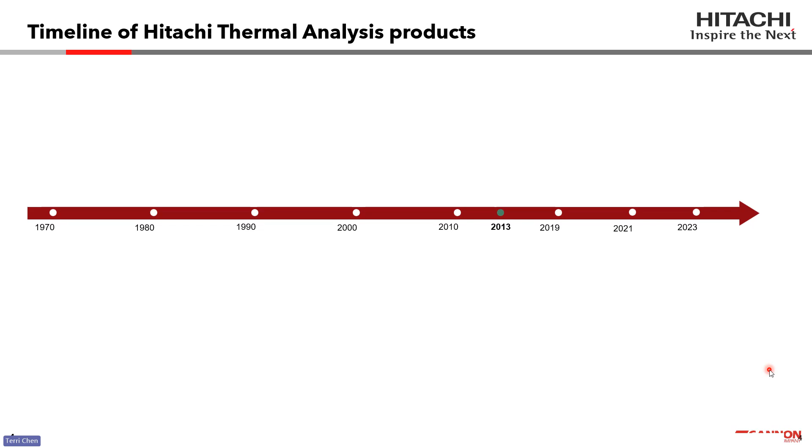So the history of Hitachi thermal analysis products traces back to the 1970s and 1980s. Some of you may still remember the name of an old thermal instrument company called Seiko Instruments. Back in the old time, Seiko was one of the world leaders who manufactured different models of thermal calorimeters. In 2013, Seiko joined the big family of Hitachi High-Tech. Ever since then, Hitachi has been investing more resources on developing new and high-end thermal analysis instruments. In 2019, Hitachi first launched their new model simultaneous DSC and TGA analysis instrument with the real view camera system. Two years later, they released their new generation DSC instrument, which has world-class baseline stability and sensitivity.

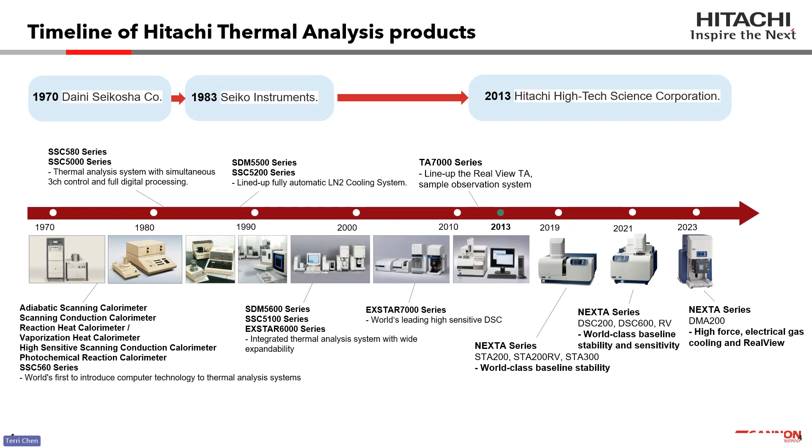Also, just last year, Hitachi again introduced their new model dynamic mechanical analyzer, the DMA instrument. As we can see, over the years, Hitachi has been actively introducing new model thermal instruments and new technologies to the world. Hitachi High-Tech headquarters is located in Oyama, Japan. They have over 70 dedicated thermal analysis employees, including manufacturing, R&D engineering, service, and applications. They have installed and sold over 10,000 thermal instruments worldwide, including in the United States.

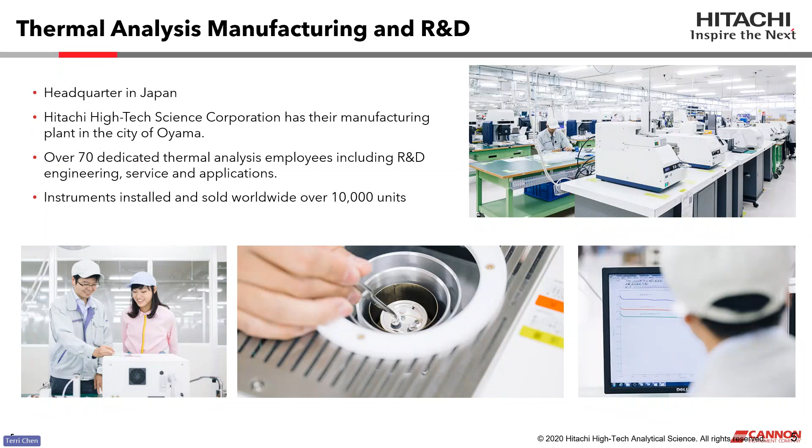Hitachi High-Tech thermal business has been very successful in many Asian countries, including Japan, China, Singapore, and India. Their thermal instruments are also popular in European countries, such as the UK and Germany. In the United States, Hitachi has its own thermal applications lab located in Dallas, Texas. They also have their own local service and support team.

This year, Hitachi is working with Cannon and is expecting to further grow their thermal analysis business in the United States. So therefore, in today's webinar, I am happy to introduce to our audience the Hitachi thermal analysis techniques. Also, I'm going to spend the majority of our time talking about the application of thermal analysis in the polymer industry. How can we use thermal characterizations to help polymer chemists and polymer engineers with their new product development and polymer processing?

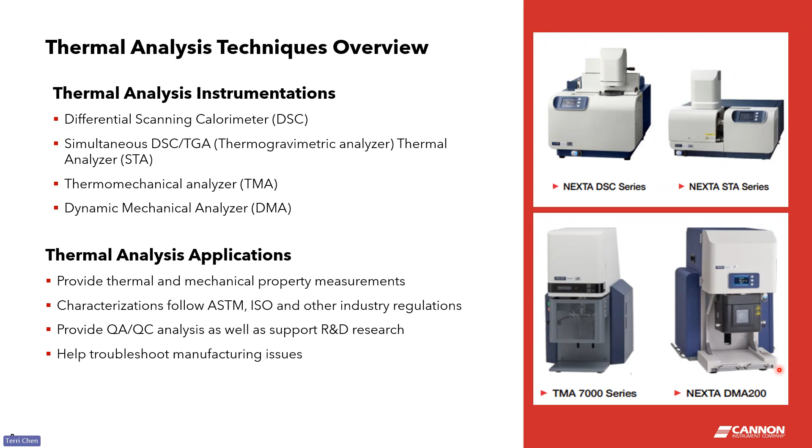Thermal analysis techniques have been widely used in polymer industries. They can help identify polymer resins, quantify impurities, provide compositional analysis, and also troubleshoot any production issues. These thermal instruments are commonly used as laboratory QA/QC tools, as well as for high-level research needs in R&D departments. Many of those characterization methods follow the ASTM, ISO, or other industry regulations. So in today's talk, I would like to specifically focus on discussing the application of 4 thermal analysis techniques: the DSC, the TGA or STA, TMA, and also DMA.

First of all, let us talk about differential scanning calorimetry. DSC is probably one of the most popularly used calorimeters in polymer industries. A DSC instrument measures the differences in heat flow rate between a sample and an inert reference. It can perform the measurements as a function of temperature or time. Through observing the endothermic or exothermic activities of the sample, a DSC scan can measure a polymer sample's glass transition, crystallization, crystal melting, polymorphic transitions, and heat capacity. The DSC technique can also be used to study thermoset curing, measure oxidative stability of a polymer resin, and also help identify impurities in recycled polymer PCRs.

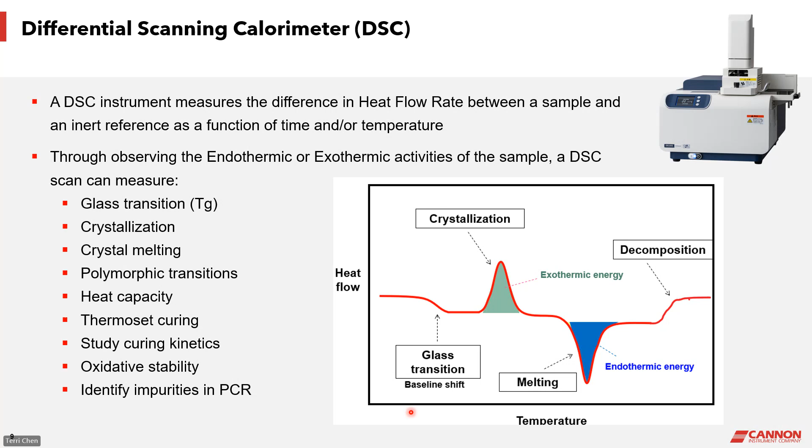Hitachi's new model NEXTA DSC provides their users with excellent baseline stability. This helps users build their confidence in data accuracy and repeatability. Hitachi DSC is equipped with a 4-finger design auto sampler, which allows up to 50 samples automatically loaded at the same time. The auto sampler provides the most reliable automation. It saves your sample loading time. For sample preparation, Hitachi provides users with an automated pan sealer, which ensures the best sample preparation reproducibility.

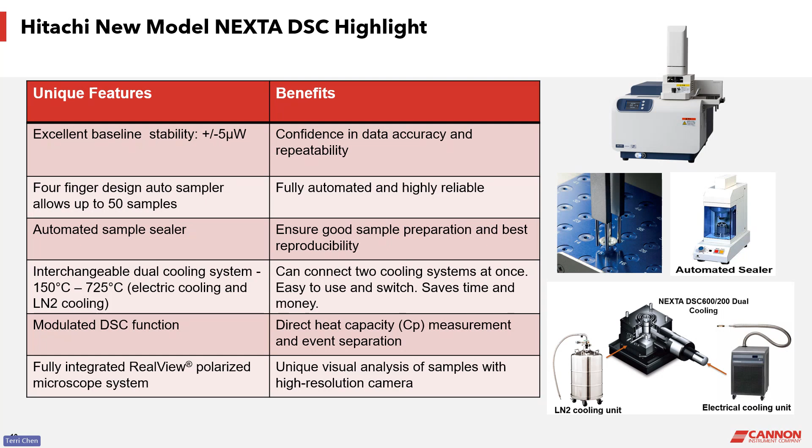One of the best technical highlights of Hitachi DSC is their flexible and interchangeable dual cooling system. Most DSC users know that a typical electrical cooling system on a DSC can cool the samples down from -40 to -90 degrees C, depending on which model you use. But if a user occasionally needs to cool the sample down to liquid nitrogen temperature, which is -150 degrees C, he or she may end up having to purchase an additional second DSC, which could cost more money and also take up more lab bench space. Hitachi DSC allows both the LN2 and electrical cooling systems installed on the same DSC unit. Users can select their desired cooling system through a simple switch in the software.

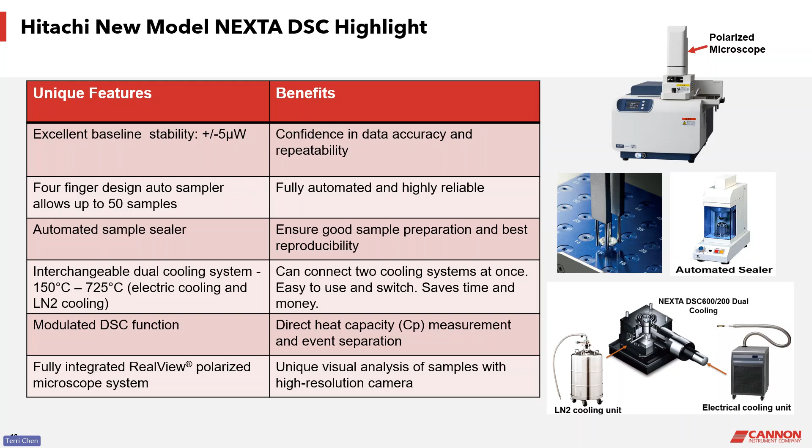Another technical highlight is this fully integrated real-view polarized microscope system. This microscope provides a unique visual analysis capability on samples during a DSC measurement. Here is a fun application example showing the usefulness of this real-view system. We put a picture underneath a piece of polymer sample. Because the polymer is partially crystallized, it looks black underneath the polarized microscope. However, as we conduct a heating test on this sample, let me play the video here.

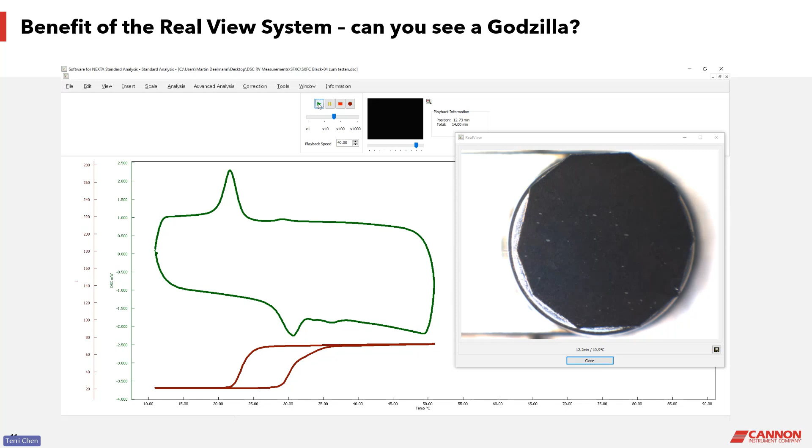When the temperature passes its crystal melting temperature, the polymer turns clear. Now we can see through. Now we see the picture underneath the polymer is a picture of Godzilla. Then, as we cool the sample down, the polymer recrystallizes and turns black again. Actually, there are many useful applications of having this polarized microscope visual capability. I will elaborate and discuss more practical examples in my later section.

The second thermal analysis technique I would like to talk about is TGA, thermogravimetric analysis. Hitachi provides their users an STA instrument, which is capable of doing simultaneous DSC and TGA measurement. In addition to monitoring the endothermic or exothermic activities of the sample, the STA technique is mainly used to measure the mass change of a sample through heating. For example, it can measure moisture or residual solvent content, monitor sample decomposition, calculate decomposition kinetics, and measure thermal and oxidative stability. It is also commonly used for compositional analysis of filled polymer composites. The STA is also a good high-temperature DSC, which can measure crystallization, crystal melting, and crystal phase transition.

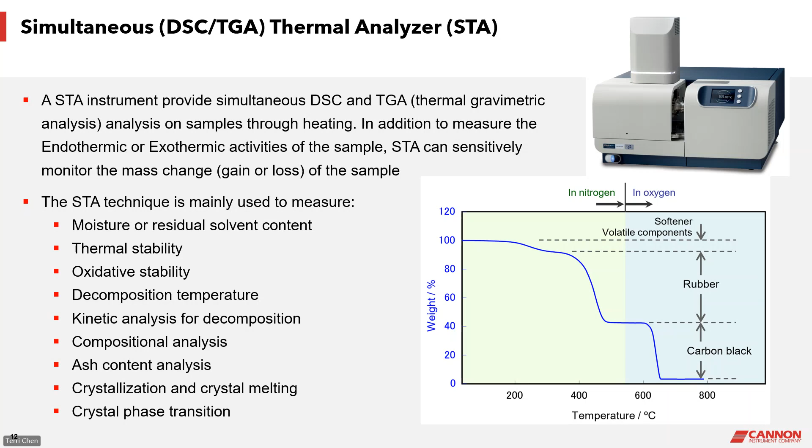Hitachi STA instruments have this dual beam horizontal design, which has low buoyancy influence with excellent baseline stability. This allows users to detect the smallest weight change even from the smallest sample size. The four-finger auto sampler design provides full automation and reliability on sample loading.

Hitachi STA has up to 4 gas flow controllers, which are easy to switch and allow mixture gas purge. Their efficient gas flow path is perfect for testing oxygen-sensitive samples. Also, the interchangeable furnace and furnace tube provide a wide temperature range and allow samples to be tested under a corrosive gas environment. Hitachi STA is also integrated with a real-view camera system.

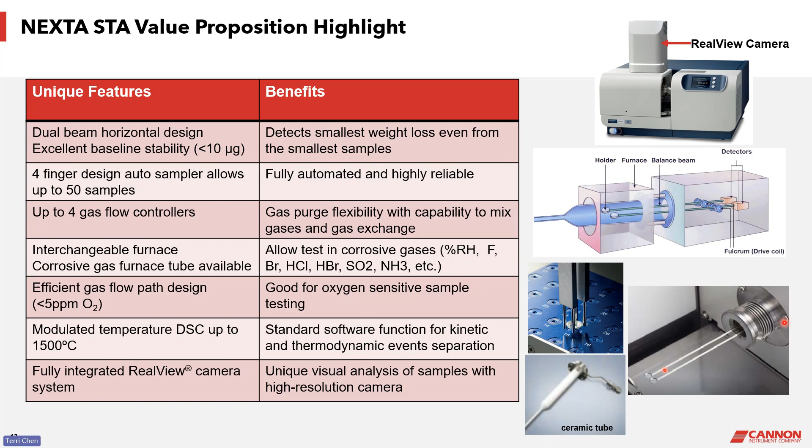One application example for this feature is that it can perform color analysis. You can monitor at what temperature your sample gets oxidized and turns yellow. The third thermal analysis technique I would like to introduce here is the thermomechanical analysis.

A TMA instrument is mainly used to measure a sample's dimension stability as a function of time, temperature, humidity, or under a certain force or displacement. TMA is commonly used to measure a sample's coefficient of thermal expansion, the CTE. It can also measure thermal shrinkage, softening point, and glass transition temperature. A TMA is also capable of performing some basic DMA mode testing, such as dynamic temperature ramp, stress relaxation, or creep.

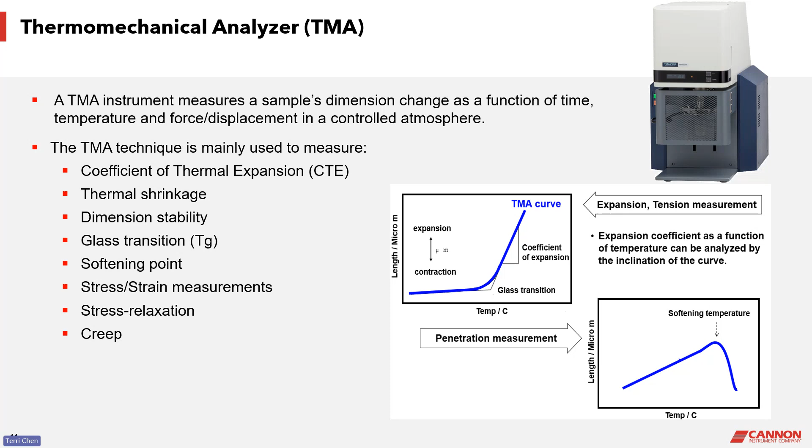Hitachi TMA provides their users with the highest force range, up to 5.8 Newton. This benefits testing large and stiffer samples and is also good for DMA mode testing. In addition to high force, this instrument also allows large sample size, which provides the best sensitivity for testing samples with low CTEs.

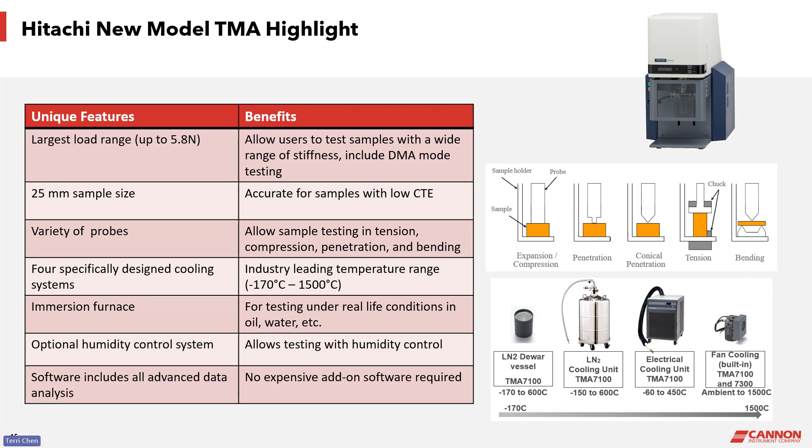Hitachi TMA instrument is equipped with a variety of different types of testing probes that allow samples to be tested under different modes, such as tension, compression, bending, or penetration. And this instrument offers 4 different types of cooling systems, which provide a wide range of temperature and flexibility for users to switch.

The last thermal analysis technique I would like to introduce is the dynamic mechanical analysis instrument, the DMA. A DMA measures the mechanical and viscoelastic properties of a material. The measurement can be performed as a function of time, temperature, frequency, or at a specific applied stress or strain. The DMA technique is mainly used to measure samples' stiffness, which is described as the modulus, and also samples' elasticity, which is described as the damping factor, the tangent delta.

DMA is the most sensitive instrument to measure a polymer's glass transition temperature, as well as any subambient beta-gamma transitions. A DMA can be used as a mini instrument to perform a basic stress-strain test to measure Young's modulus. It can also perform some transient measurements, such as creep recovery or stress relaxation.

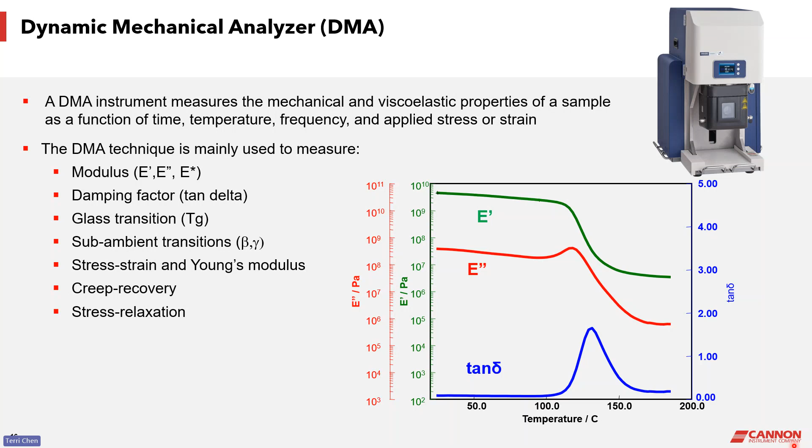Hitachi's new model DMA was just released last year in 2023. This DMA has a completely new motor design with a wide force range up to 20 Newton. This allows users to measure any type of sample from soft to stiff. The instrument is equipped with all measuring clamp options, which allow samples to be tested under different deformation modes, such as tension, bending, compression, or shear.

Hitachi DMA provides users with 3 different cooling options, which give a wide range of temperature control. The software offers a Wizard for sample handling, clamp calibration, and experimental setup, which is perfect for new users. Hitachi DMA is also equipped with a real-view camera system that allows users to see the sample during the measurement.

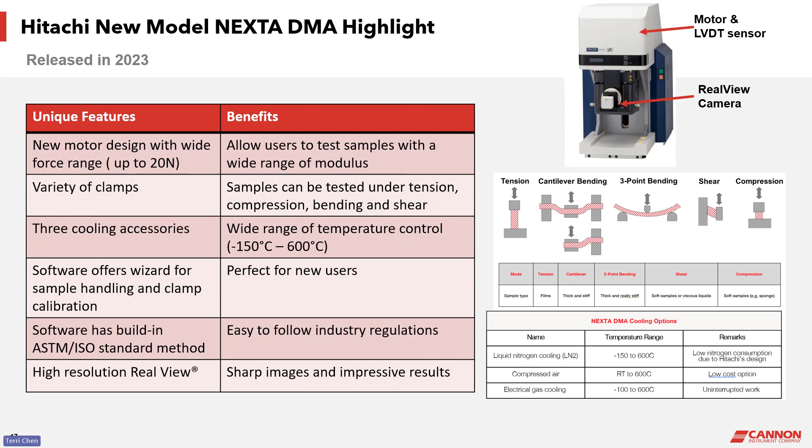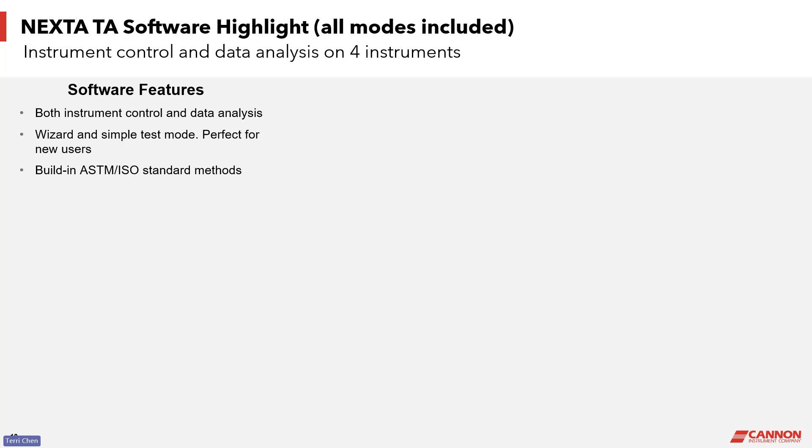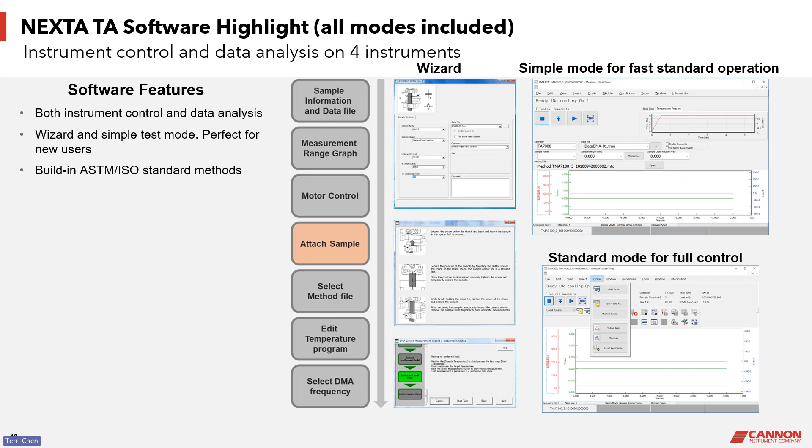Before we jump into discussing applications, I would like to also highlight some of the good features of the Hitachi NEXTA software. First of all, the NEXTA software is designed for both instrument control and data analysis on all 4 of their thermal analysis instruments. NEXTA software has a built-in Wizard with calibrations, sample handling, and experimental setup. It also has this simple test mode setup, which is perfect for new users.

In addition, Hitachi software has built-in ASTM, ISO, and other industry standard methods, which allow users to easily follow the industry regulations. This software is easy to use and self-learn.

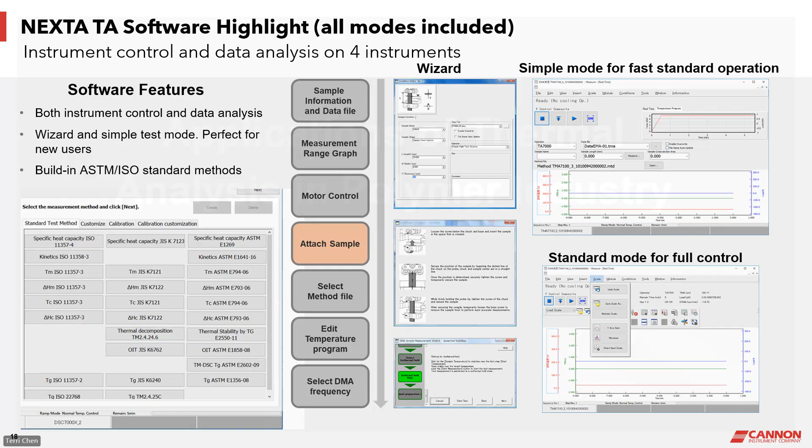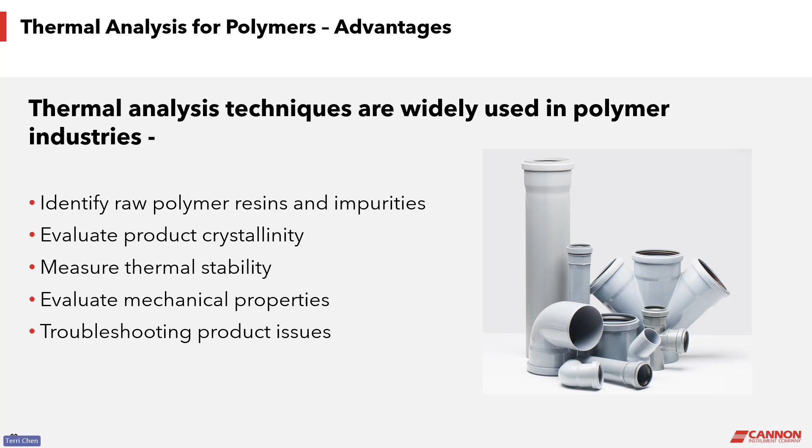In this next section, I would like to discuss some practical application case studies on how to use thermal analysis techniques to help with polymer product development and polymer processing. Like I said earlier, thermal analysis techniques are widely used in polymer industries. People use thermal analysis to identify their polymer resins, quantify impurities, evaluate product crystallinity and crystal melting, measure mechanical properties, and also troubleshoot production issues. First of all, let's talk about DSC applications.

DSC is probably the most commonly used thermal instrument in polymer characterization. DSC analysis is typically used for identifying the raw material. A simple DSC temperature scan can tell you if this polymer resin is a polyethylene, polypropylene, or if it is a PET resin. DSC identifies polymer IDs based on the differences in their glass transition and melting temperature.

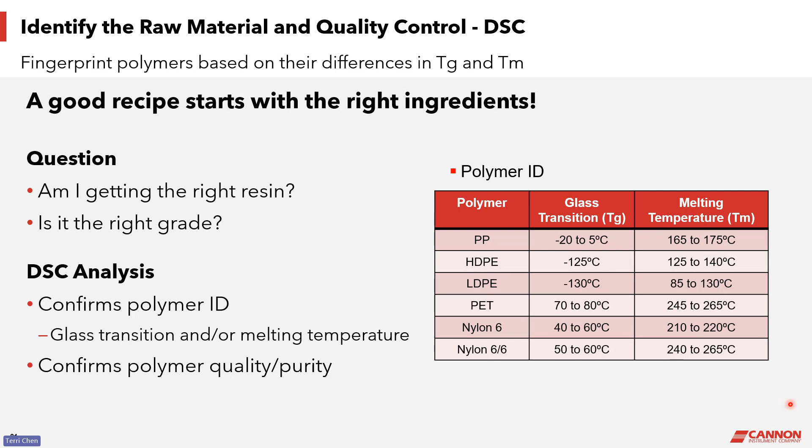Even within the same type of polymer, for example, polyethylene, the DSC measurement can also sensitively differentiate the differences in different grades. Here is an example of using DSC to differentiate the different grades of polyethylene resins. LDPE, low-density polyethylene, mostly contains long-chain branching structure. Therefore, they usually have relatively lower density.

Figure 1 shows two different grades of LDPE resin with different density. The measurement results show that they have their crystals melt at different temperatures. The higher the density, the higher the melting temperature. This same trend can also be observed in the case of HDPE resin.

High-density polyethylene resins are mostly linear. Therefore, they usually have higher density with higher crystallinity. Their crystal meltings are also observed at higher temperatures compared to LDPE resins. So figure 2 shows that for HDPE resins, higher density also leads to a higher melting. In polyolefin industries, this DSC measurement is commonly used to identify different grades of polyethylene and polypropylene resins.

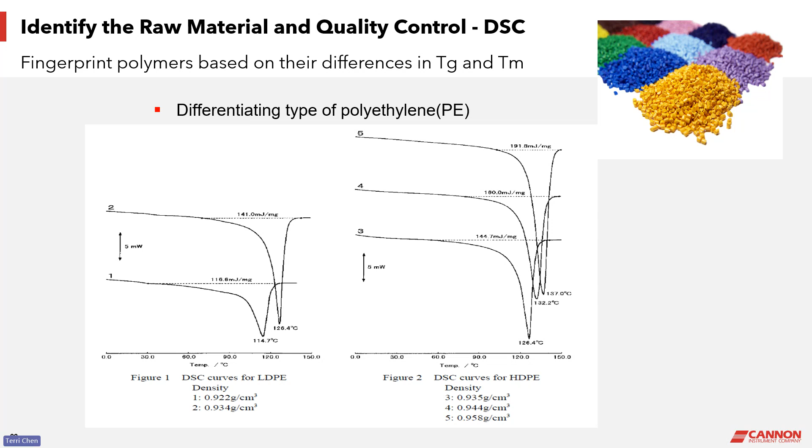DSC technique is also commonly used in polymer recycling for the purpose of identifying and quantifying impurities. So in this case study, from a DSC temperature scan, we observed a big crystal melting at temperature around 130 degrees C, which correlates to the melting of HDPE. From these results, we can say that for this particular batch of PCR resin, it mostly contains HDPE.

However, at temperature around 160 degrees C, we can also identify another small melting peak, which correlates to the melting of PP. So with integrating the melting enthalpy and comparing to the melting enthalpy of a pure PP, we can get a reasonable estimation to find out how much PP contamination there is in this particular batch of PCR.

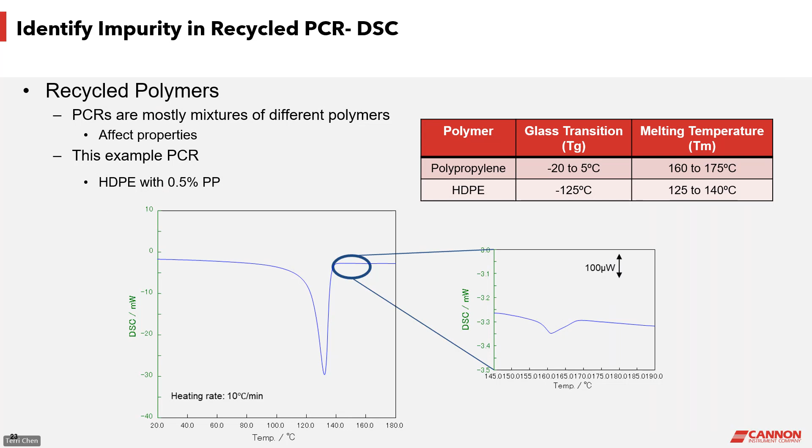DSC is commonly used to determine the oxidative stability of a polymer. There are some industry standards, such as ASTM, ISO, or DIN standards. They all provide specific instructions of using DSC to identify the OIT of polymers. OIT means oxidation induction time. This is a standard DSC test method to study the time of a polymer to start getting oxidized at a certain temperature. The figure on the left side shows the OIT test of 3 different grades of polyethylene resins.

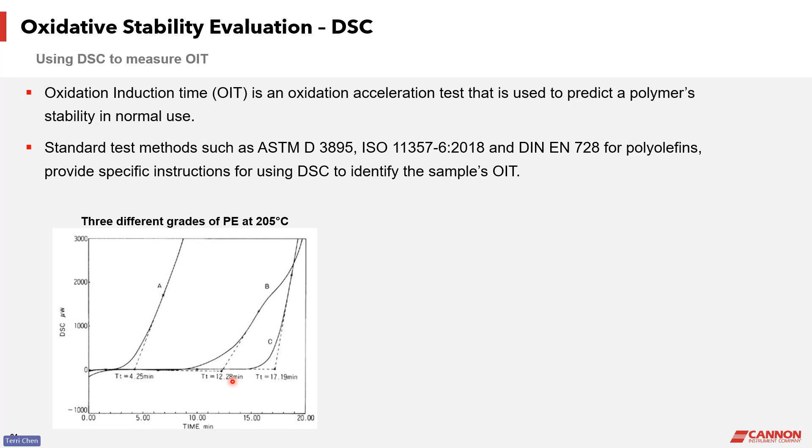After equilibrating at temperature of 205 degrees C, we switched to use air purge, introducing oxygen into the DSC furnace. So the OIT time is defined as the onset point at the heat flow curve. So from this comparison data, we can see that sample A has the shortest OIT, which means this sample has poor oxidation stability. This resin may need to add some additional antioxidant to enhance its stability. Well, sample C has the longest OIT, which means this resin is most stable against oxidation.

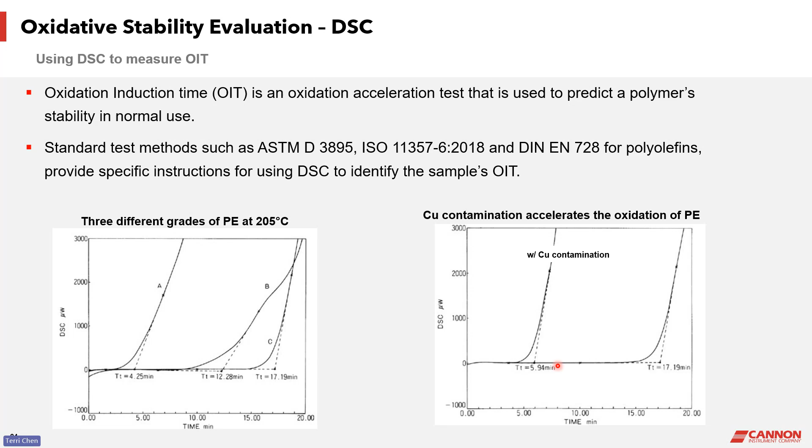The figure on the right side shows that copper contamination could significantly accelerate the oxidation of polyethylene. With just a small amount of copper contamination in PE, its OIT time is observed to be significantly shortened from the normal 17 minutes to less than 6 minutes at the measurement temperature.

Polymers' crystallinity and crystal structure have big impact on the mechanical properties of their end-use product. Because DSC can precisely measure the crystallization and crystal melting of polymers, this technique is commonly used by processing engineers to guide their polymer processing. Here, we would like to discuss 3 examples on processing polypropylene under different conditions.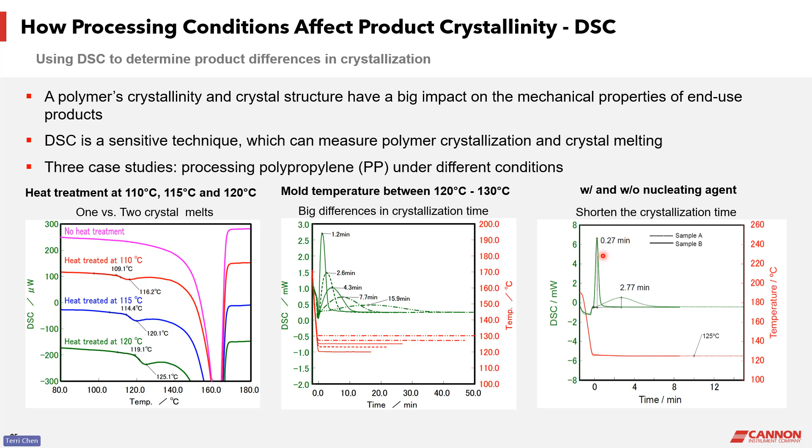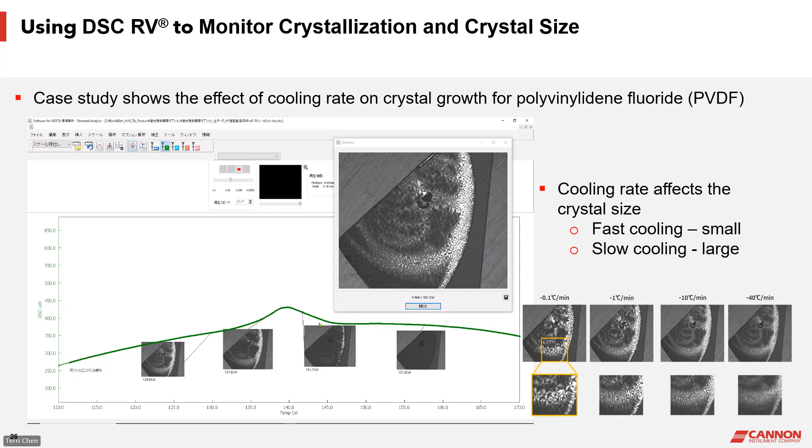Here is another practical example showing the importance of using a real-view microscope system with DSC analysis. Packaging films are commonly laminated with multiple layers. Each layer could be as thin as less than 5 micrometers. The DSC analysis in combination with this polarized microscope allows people to identify the type of polymers in each layer. This is a very interesting reverse engineering case study.

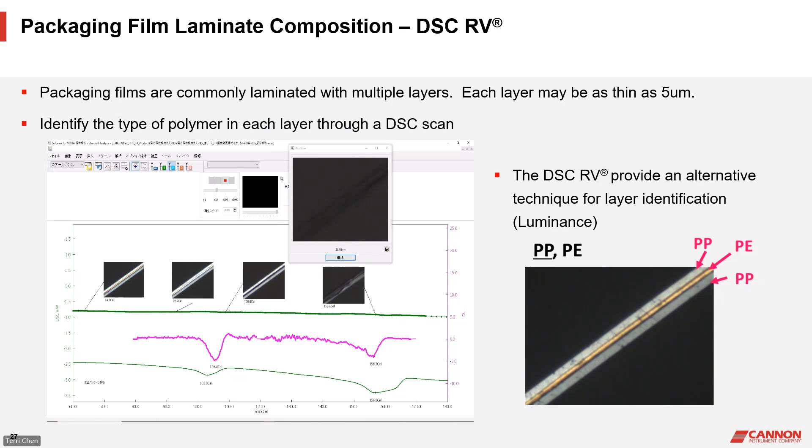Now, let us change subject and talk a little bit about the application of the STA technique. The STA instrument can perform simultaneous DSC and TGA analysis on polymers. This technique is commonly used for polymer compositional analysis. Here is an example of using STA to measure a recycled PCR resin.

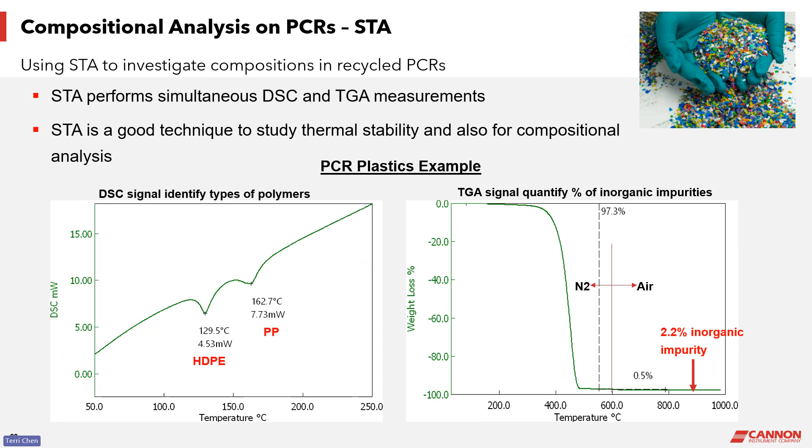And then we switch the gas purge from nitrogen to air to further burn down additional carbon. After that, there are about 2% of residues that cannot decompose in the testing temperature range. So this result tells us that there are about 2.2% of inorganic impurities in this recycled plastic resin.

Here is another interesting study of using TGA-STA analysis to quantify the thickness of polymer coating on drinking cans. Soda and Coke cans are made of aluminum. However, we all know that Coke or Pepsi are very acidic. The pH of Coca-Cola is reported to be only 2.6 to 2.7. So over time, they could cause corrosion to the surface of the can.

In order to prevent acidic corrosion, people coat the surface of the can with a thin layer of polymer. One of the most important pieces of information a can manufacturer would like to know is how thick they need to coat their cans. If the coating is too thin, it cannot provide efficient protection. But if the coating is too thick, it is going to cost more money.

A TGA analysis can help you to quantify the thickness of a can coating, how thick your competitor coat their cans. To find out the answer, we can cut a piece of can and load it to a TGA or STA instrument and conduct a simple temperature scan measurement.

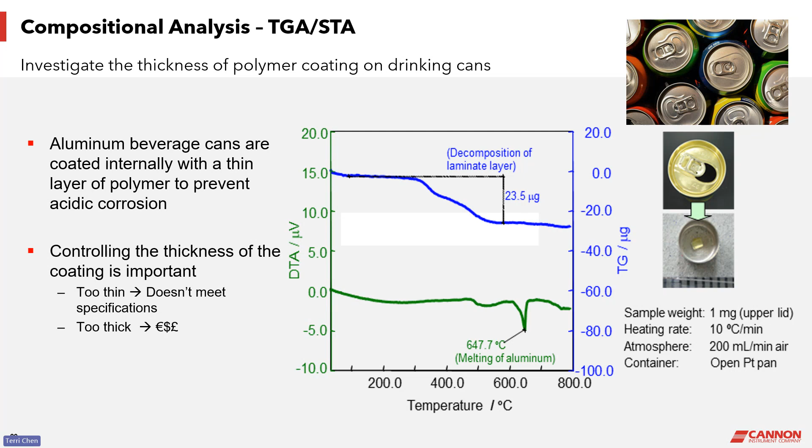At temperature greater than 400 degrees C, we observed a small percentage of weight loss, which correlates to the decomposition of the polymer coating. So using the mass of the polymer and the can surface area, we can then calculate and estimate the thickness of the coating.

Here is another example of using TGA-STA technique to do reverse engineering study and find out the formulation of a competitor's product. Rubber compounds are mixtures of multiple components, including natural and synthetic rubbers, some small molecule ingredients such as lubricating oils, and other ingredients such as cross-linking agent, colorant, inorganic fillers, or carbon black.

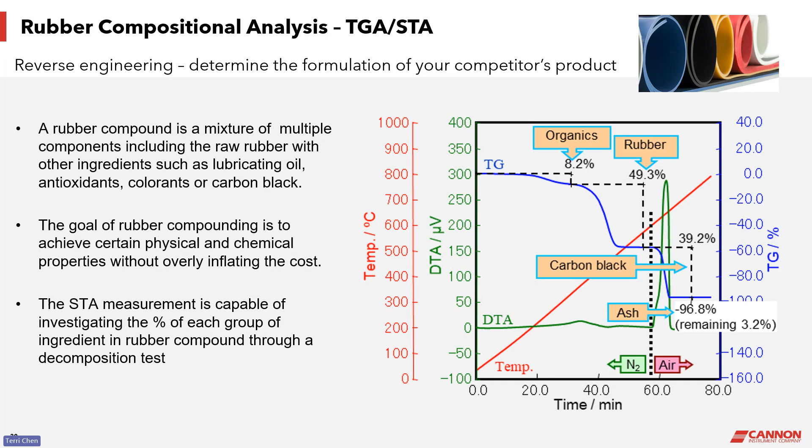In addition to using TGA for compositional analysis, other thermal analysis techniques such as DSC, TMA, and DMA are also commonly used in rubber industries. Here is one example of using DSC to investigate how carbon black affects the thermal behavior of rubber compound.

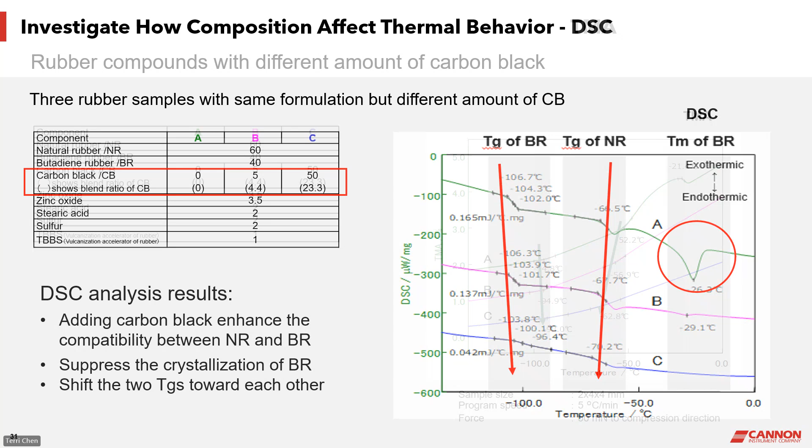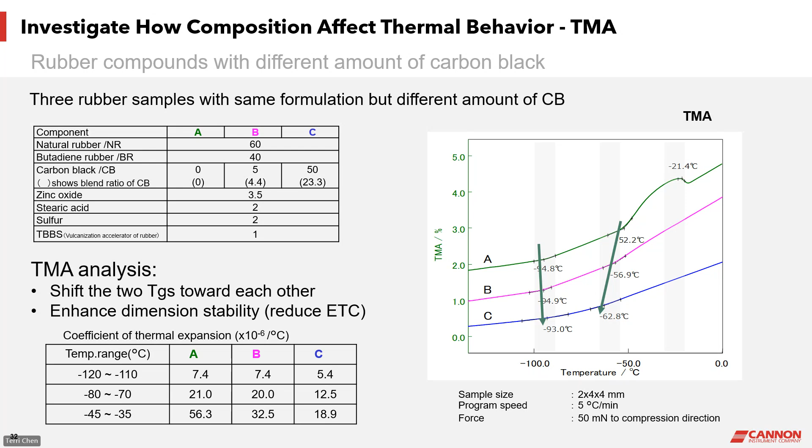A TMA instrument is commonly used to study a material's dimension stability over temperature. Another application example is in printed circuit board manufacturing. The PCB board is made of glass fiber reinforced epoxy and laminated with multiple layers with electrical components and other insulations and materials. During their applications, any differences in their expansion could potentially cause cracking or delamination, which leads to product failure. Therefore, in the PCB industry, people have created a specific industry standard method of using TMA to quantify the CTE on a circuit board in all three XYZ directions.

In addition to measuring thermal expansion, TMA is also sensitive in monitoring your material's thermal shrinkage. Here is a fun research of studying the anisotropic behavior of a shrink wrap. So let us peel off some labeling film from a water bottle, and then we cut two pieces of samples from both the lengthwise and crosswise directions. We load these two samples to the TMA and conduct a temperature ramp experiment.

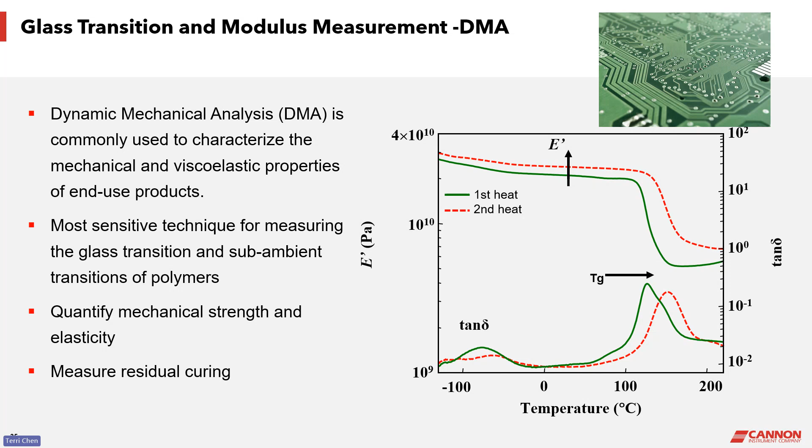During the first heating, we can measure the glass transition temperature of an uncured resin and also quantify the exothermic curing activity. After the first heat, we cool it down and then conduct a second heat test. From this second heat measurement, we observed a big shift in glass transition temperature. No further curing activity is observed, which means this sample was fully cured through the first heating.

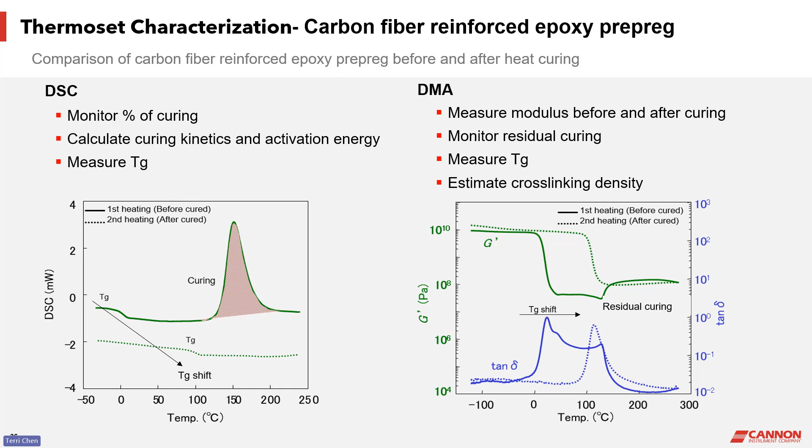Secondly, DMA is another common technique to study thermoset curing. A DMA measurement can quantify the modulus change of the sample from before and after curing, monitor any residual curing through the first heating, and also monitor and quantify the Tg shift from before and after curing. In addition to that, DMA is one of the key characterization techniques which allows people to calculate and estimate the cross-linking density of a thermoset material.

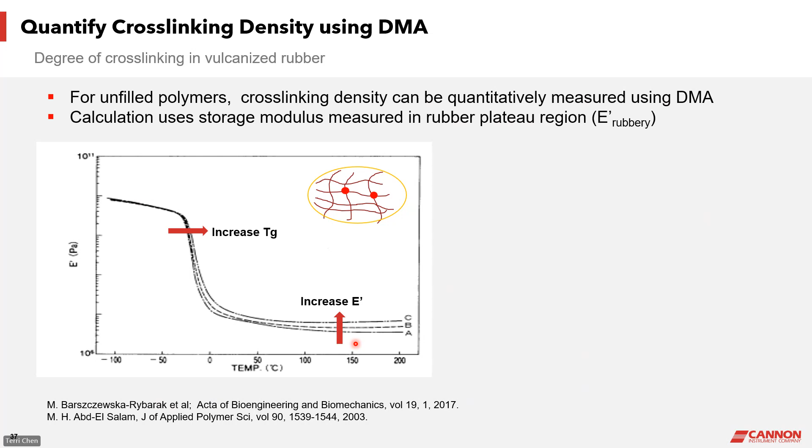The major difference we observed from this test is the differences in their storage modulus at the temperature above their glass transition, in this rubbery plateau region. The higher the cross-linking density, the higher the storage modulus. There are some literature reports saying that for an unfilled, simple structure thermosetting polymer, the degree of cross-linking can be quantified through measuring their modulus in the rubber plateau region.

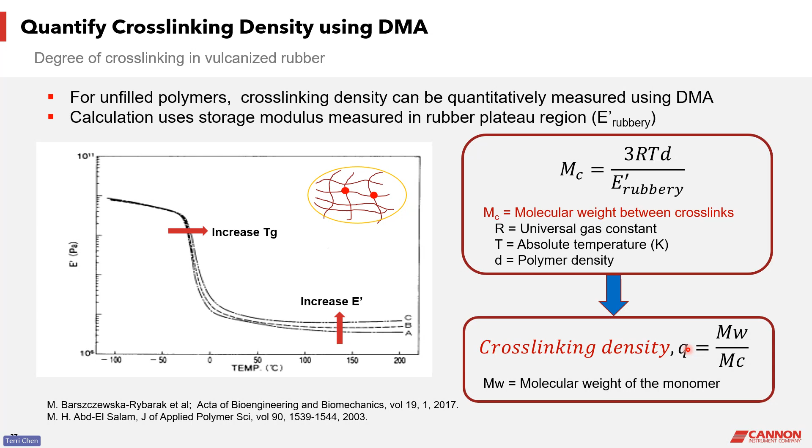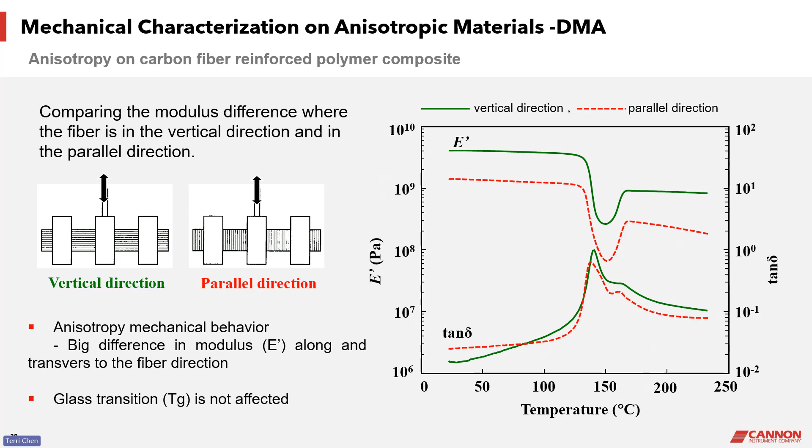Finally, I would like to talk a little bit about the time temperature superposition technique. TTS is a very useful empirical theory that is commonly used in DMA analysis to predict the properties of a material over a wide range of frequency or a wide range of temperature scale, which is way beyond an instrument's measurement range. The low frequency data can be used to predict a material's behavior over a long time scale, such as years long or 10 years long, that cannot be practically achieved through a single measurement.

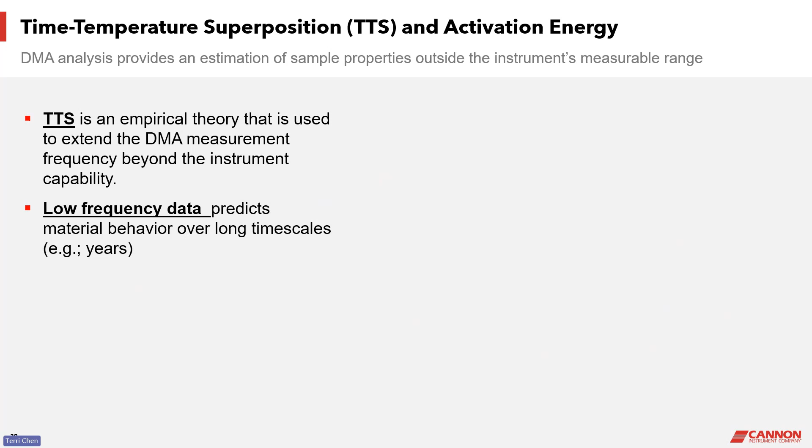The high frequency data helps to predict a material's behavior in a short time scale, such as high-speed impact or acoustic vibration, that are beyond the instrument measurement capability.

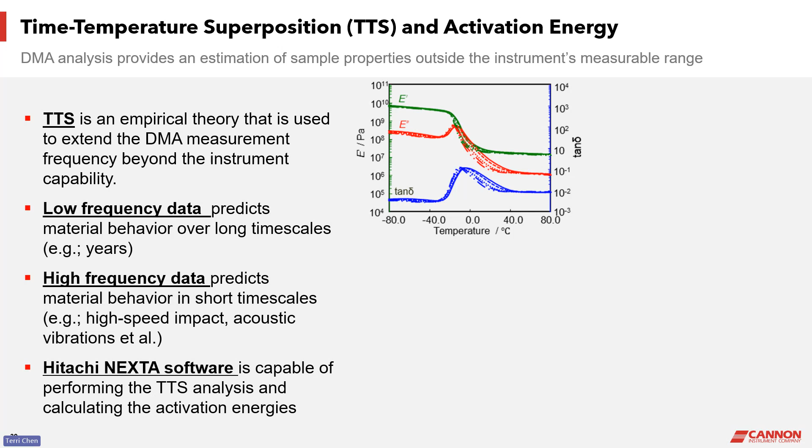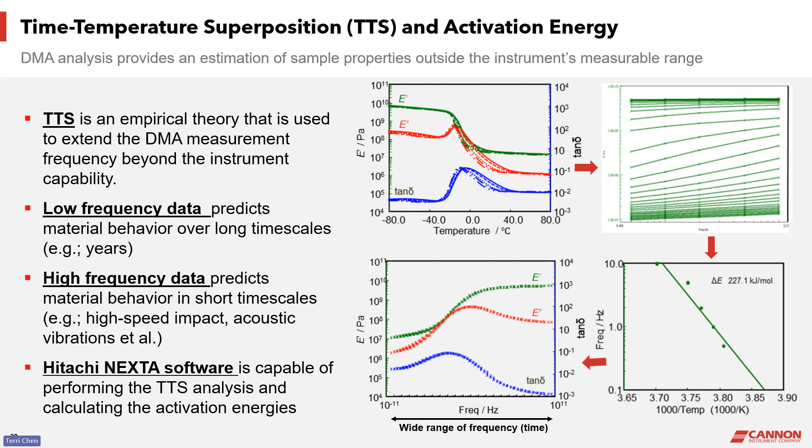Time temperature superposition analysis is a standard feature on Hitachi NEXTA software. From a typical DMA temperature sweep test at different frequencies, the NEXTA software can shift the curve, calculate the activation energy, and also create the master curve reporting modulus and tan delta over a wide range of frequency.

So in conclusion, thermal analysis provides useful characterization techniques for understanding your polymer materials and ensuring the quality of your product. The applications of thermal analysis range from polymer resin identification and QA/QC analysis to troubleshooting any production issues. Different techniques such as DSC, STA, TMA, and DMA provide the measurements from different perspectives.